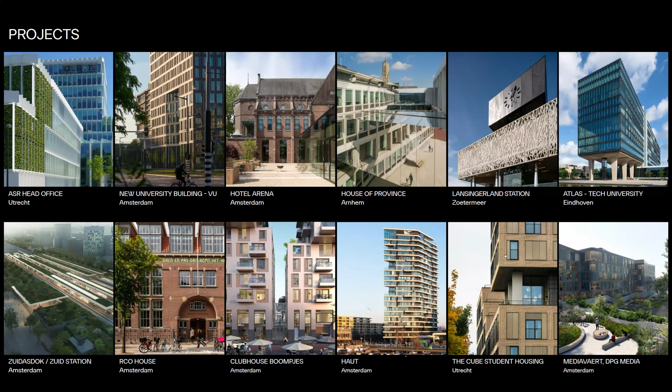Our office does many sorts of projects, mostly in the Netherlands. At the moment we do one project in Belgium, and we work on train stations and mobility. We work on refurbishing existing buildings often, and on sustainable new build projects, both residential and office, and various cultural projects. That diversity we really like, and it helps us transfer knowledge from one kind of project to another. It's an office of about 55 people in the Netherlands, so I'm here representing all of them.

In 2016, as was said, we started working on a timber tower. One interesting thing to realize when talking about sustainable buildings is that population growth worldwide is going to happen within cities, not so much on the outskirts, but really in dense inner cities. Traditionally these cities were always made, this is London where I studied, out of steel, concrete, and glass.

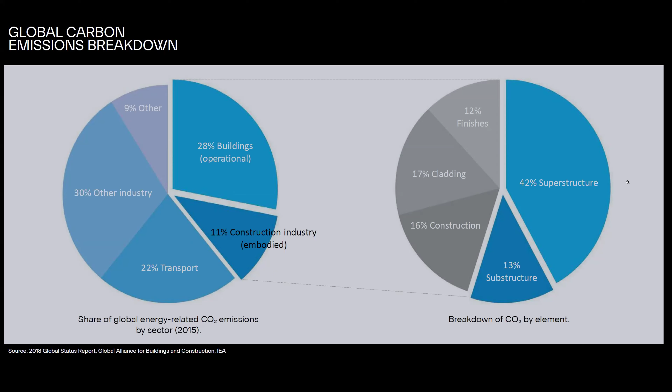When looking at the carbon emissions of the building industry, buildings are a large part of that construction industry. But within the construction industry, the superstructure of buildings takes up by far the largest part of the carbon footprint. So for us, it felt quite natural, when looking at sustainability, to look at that superstructure first. We started looking at timber buildings at a time when that was not often done yet, specifically not in the Netherlands, but actually even worldwide there were only a few large, tall buildings made with timber.

But timber has a number of great advantages. The timber stores carbon while it's growing, and the carbon remains stored in the timber as long as it's not burned, rotting, or taken out. It's a circular material, it's flexible, it's beautiful, we think. It's comfortable, it's lightweight. It allows for faster construction, and it allows for customization because it's not coming out of a mold, but can be computer aided, sawn or shaped. That way you can really make each component of a building to a custom size or custom form.

That storage of timber is important in the whole story. So before you actually construct a building, the timber stores the carbon. A building then, of course, by using energy and all sorts of things, starts to emit carbon again. But because you start from a kind of negative impact, that is always helpful in the long run across the whole lifespan of a building. It was nice also because timber is really circular in its production.

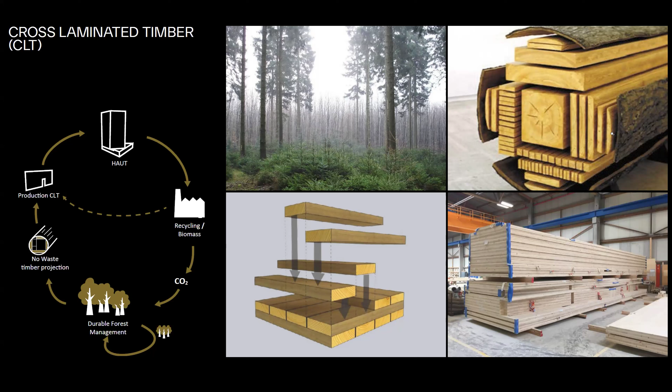We also like that the mass timber we were going to use for HAUT isn't the hard inner core of trees that's used for CLT or mass timber, but actually the outer parts, whereas the inner parts are used for furniture. It's actually the leftover area of the tree trunk that's used for this mass timber. When we started in 2016, we went to see a factory straight away, and you see how lightweight the pulleys are to lift up an entire wall panel.

That really shows that building in timber can be done with lighter equipment and with less energy production or energy consumption, and therefore a smaller footprint on site as well.

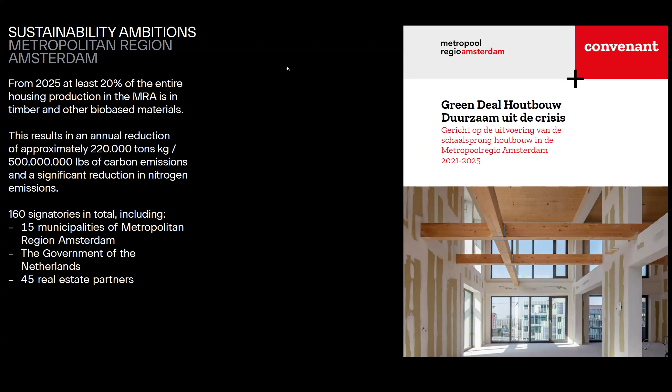Since we've started in the Netherlands, I thought I'd give you a quick insight into what's happening in timber building within the Netherlands. The main cities in the metropolitan region have committed to a Green Deal of timber building, saying at least 20% of housing production should be in timber. This includes governments, local governments, construction companies, developers, and architects, all committed to attempting to get at least 20% of the entire housing production in timber.

We haven't been able to calculate yet whether that's going to happen this year.

One of the interesting things about the Netherlands is that we have a code structure that is performance-based. So in the Netherlands, it's relatively easy, compared to for instance Germany or North America, to use our building codes to innovate, because we can engineer to structural standards. It's not given that we can only build, for instance, 6 stories in timber. We can build as much as we can, as long as we prove with calculations, conforming to certain norms, that the buildings will stay up and are fireproof.

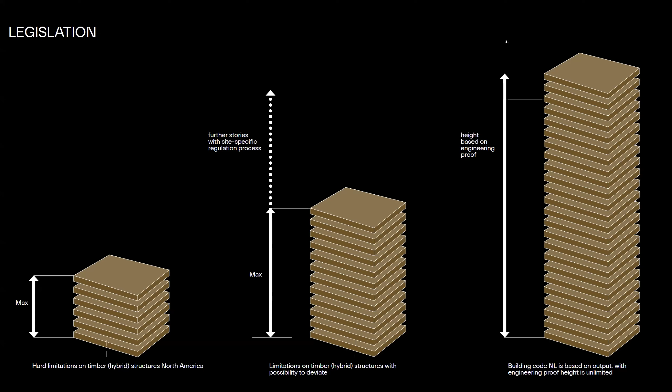What we also notice is that there are quite a few timber networks in the Netherlands, various networks of companies and people who work together to really share knowledge, to innovate, and to push timber building forward.

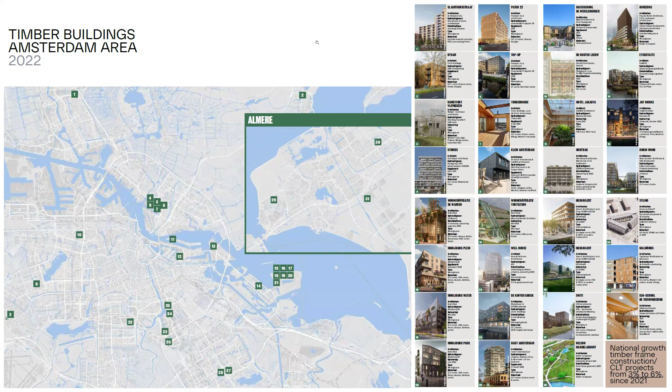This is Amsterdam, the city I'm calling in from, and this is a map from 2022 of timber projects that were on the drawing board, on site, or built. This shows that it's not quite a main revolution yet, but it's really taking a leap.

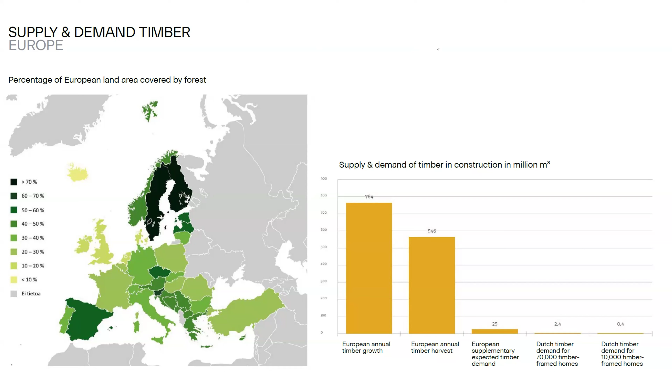Evgeny will talk about this much more, but there's still a lot of timber supply within Europe and outside it. The calculations at the moment show there's an excess of production forest, so we can still continue to build a lot in timber.

All that helps to move the construction industry from mainly focusing on concrete and steel towards one that is also using timber.

What I really like as an architect is that you put these little saplings in the ground, forests grow, and if you harvest those sustainably and carefully, you can regrow saplings. It's that fully circular material.

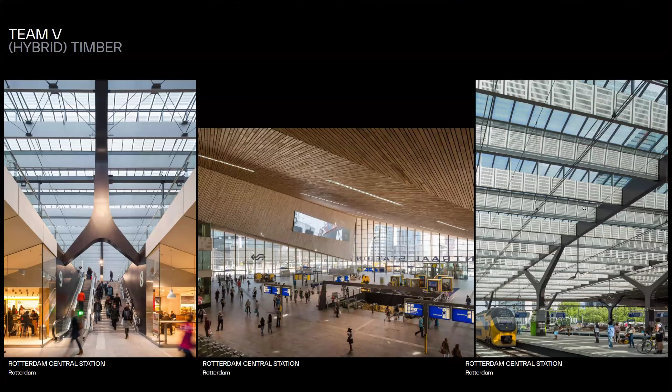As an office, for the first time, we worked with large-scale laminated timber construction, timber beams in this case, on the Rotterdam Central train station, also using a lot of timber cladding. At the moment we have delivered various projects, and I'm going to be talking about those today briefly.

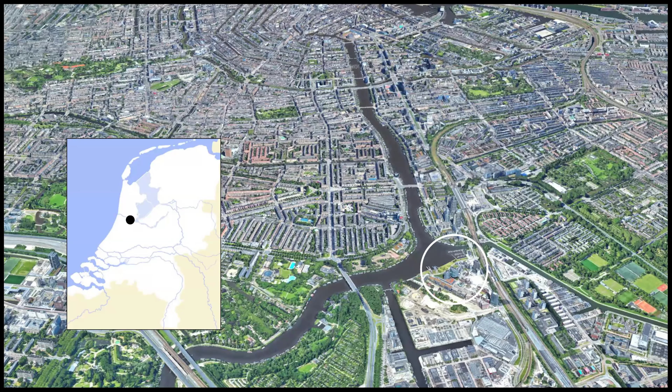HAUT, the first tall timber tower in the Netherlands, is located just outside the center of Amsterdam on the river Amstel. It started at a time when there were only 5 other large-scale timber buildings worldwide. We did a render in a tendering process, in a competition process, and in the end it turned out like this - realized in 2021.

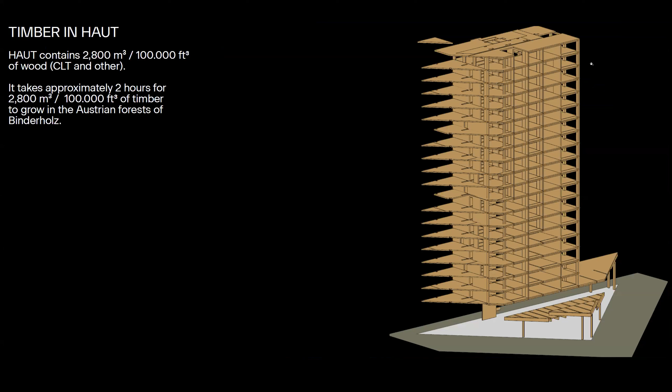HAUT contains 2,800 cubic meters of wood, which takes about 2 hours to grow in the production forests of Austria.

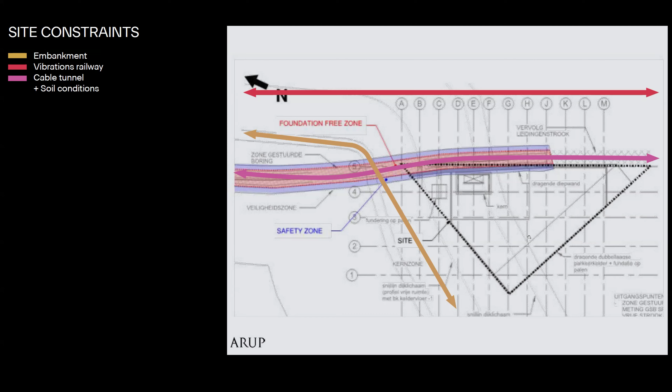It's alongside a train track, a road, and an underground dam for the water, so it's tricky ground conditions that meant our building was really challenging to get stably founded in the ground. Still, we really worked towards a hybrid construction.

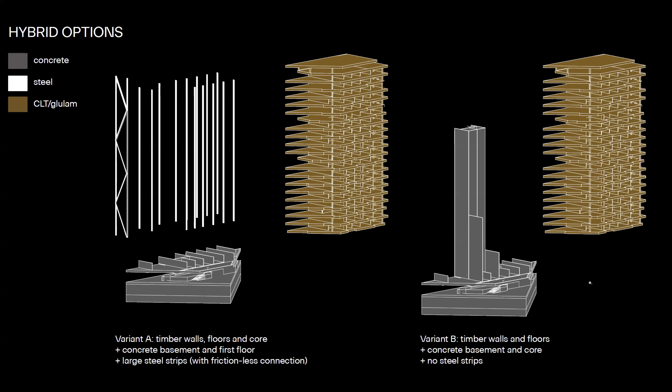It's actually a hybrid building with steel, concrete, and a lot of timber. We compared 2 ways of building: one with a main timber structure using steel strips to create integral stability through shear walls, and the other using a concrete core with 2 fins of walls and everything else surrounding it in mostly timber with a bit of steel. In the end, the version on the right was faster to build, technically less challenging, but most of all had a smaller carbon footprint. So this hybrid option with concrete and timber was what we went for.

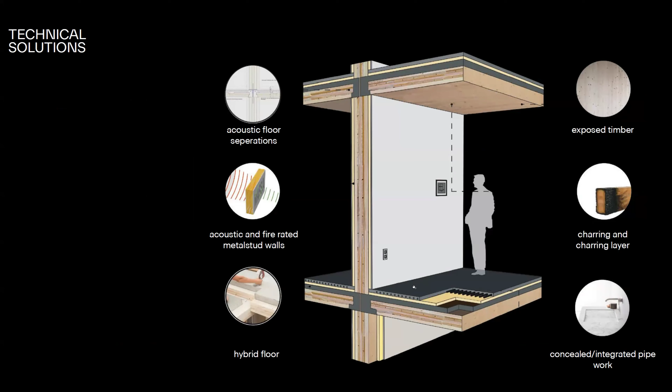These integral floor elements were made in the factory, and the concrete and the timber are joined together with a kind of Japanese joint and various kinds of screws that were put in to create a structurally integral element that also helps for vibrations and noise.

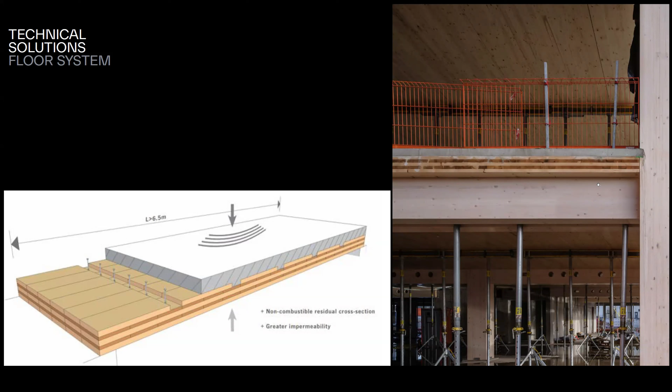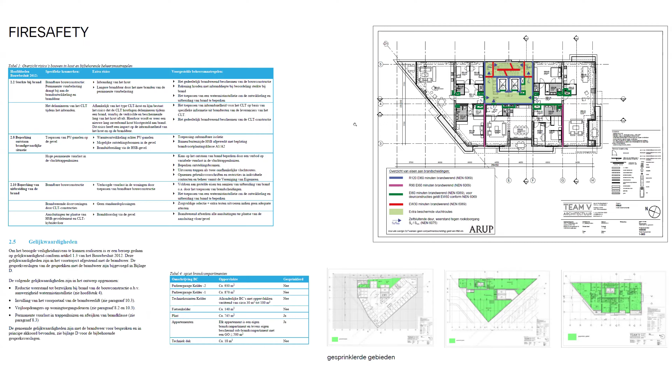We worked with Arup also on fire safety, and the building has compartmentalization, of course. The concrete core helps for that. In general, the building structure has a constructive fire rating of 90 minutes, and the sprinkler installation helps to get it to 120 minutes, which we need for a 70-meter tall tower.

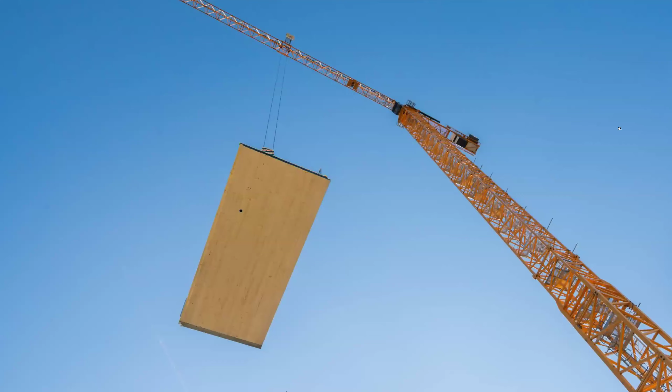So here you see the concrete core going up, and around it the timber elements of the floors and walls that are lifted up by the crane, then installed in place, first the walls with a kind of steel fins to then connect the floor plates to, and here you see it on site.

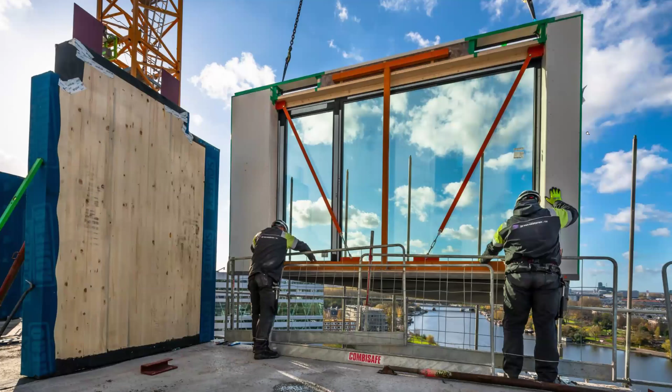With the various openings that we made for the apartment layouts, within 6 working days one whole floor was installed, both structurally and with a prefab facade that already had the window frames and the glass in it. So the facade was really important to get it fast onto the structure to make sure it was watertight.

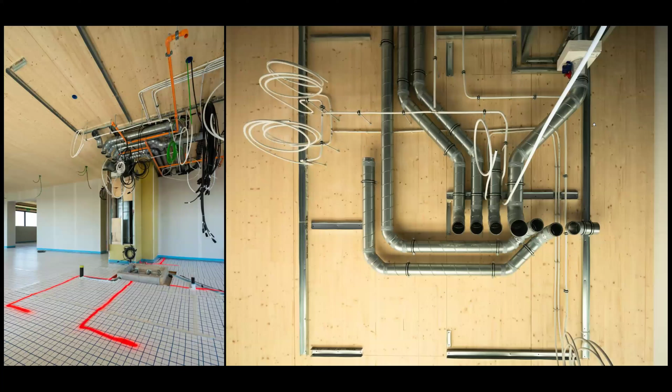The building is nearly all what we call an open building. So all the MEP, which in the Netherlands is generally cast into the concrete and therefore not easy to change, is here open and mounted on the timber so that MEP can be changed over time. The only thing that is not like that is the underfloor heating and cooling.

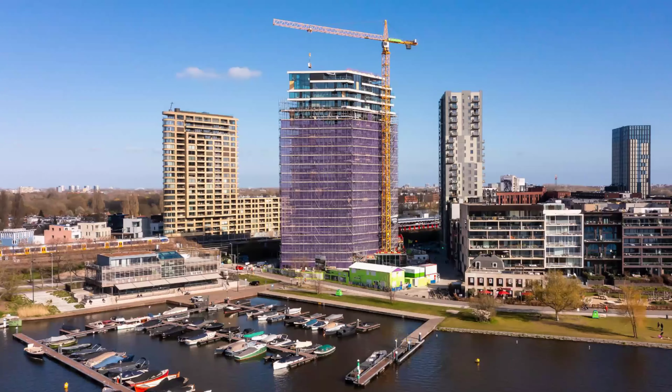And here you see the scaffolding going back down on the facade.

This is a high-end apartment tower. It was one of the last apartment towers that were for the free market only. So all the apartments have been for sale, and have been sold in the meantime.

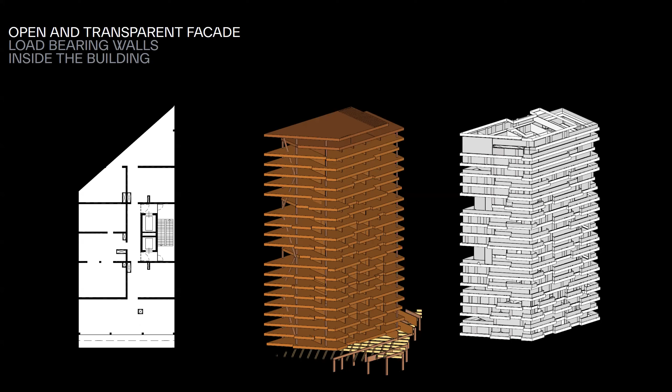We wanted to maximize the views of this beautiful location, so we made a kind of comb structure out of timber and concrete. That is the main structure of the building, so that we could keep the facade all transparent. Here you see that also in the plans. It also allowed for very large balconies and openings, and here you see that in the facade.

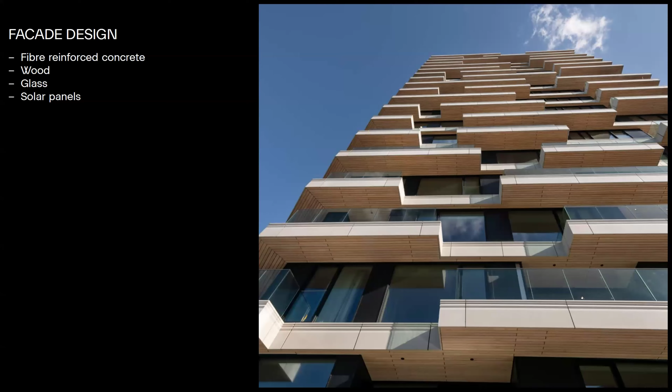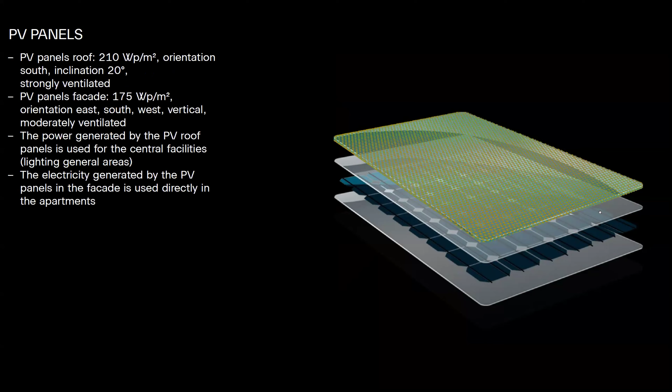We put lots of PV panels in the facade, in total about 850 square meters, to provide energy use for the apartments. So the energy is actually used for the apartments themselves. We integrated that into the facade in a way that we maximized with a computer model all the revenue we could get out, even though there are balconies and overhangs, but also so that you didn't see them so much. In the end, the facade does look really great.

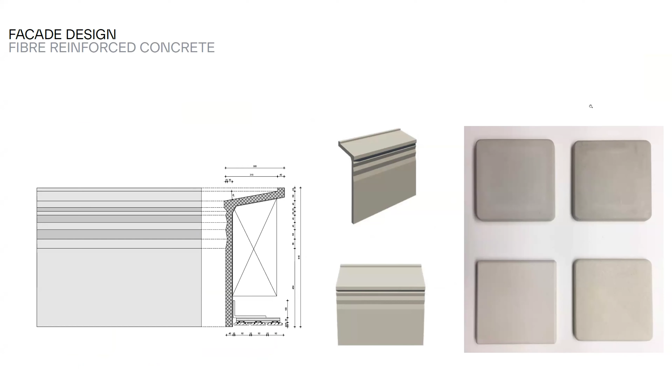We used a super thin concrete for the roof, for the floor edges. And of course, the detailing of these timber buildings for the first time was really quite tricky to do well and to make sure that it all complied. Here you see again the hybrid floors.

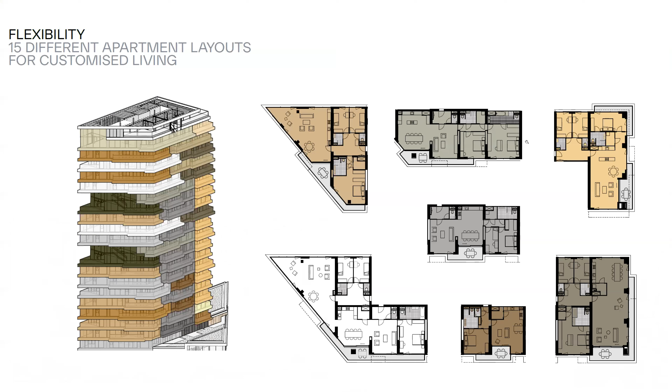We worked with some of the residents to provide layouts for each type of apartment. There's a whole variety in this building, from very small to very large. One of the things we managed to do, also due to the sprinkler installation, was to make sure that the ceilings could be exposed, which saved the cost of cladding, but also made sure that you can actually see some of that timber.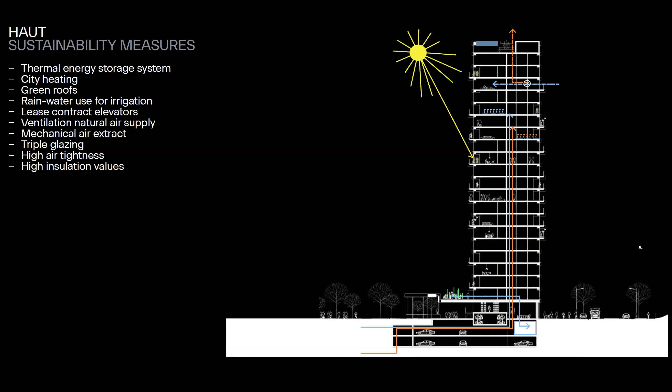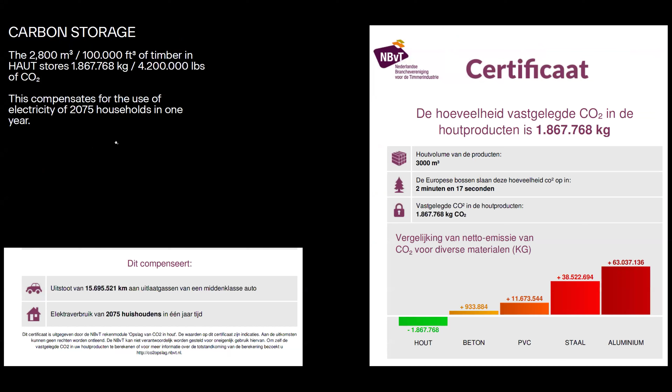It was a building for us that really took a flight. It was published internationally at the time. And we're really happy that we managed to realize it, because during construction, or just before construction, that was really quite tight.

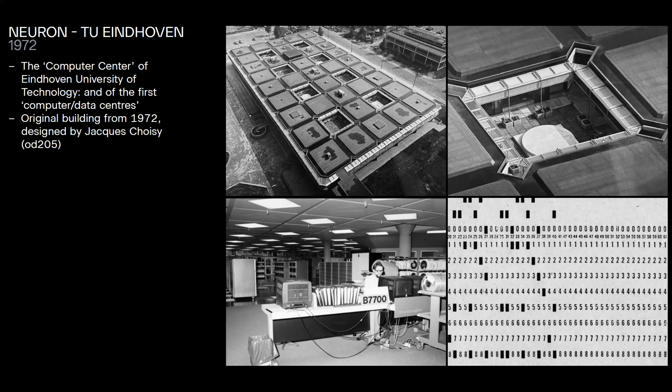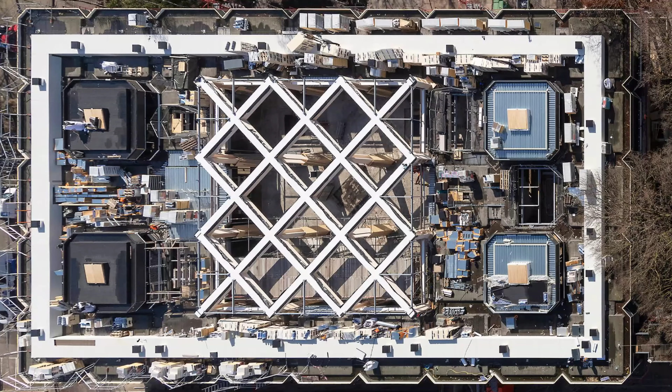I'll flick through a few other projects very quickly. This is a project where we topped up in timber on an existing university building, making a hole in the middle and putting a lightweight timber structure on top. That helped because the main structure of the existing building could then hold its extra weight, and it gave us a kind of atrium space on an existing building. We find that topping up in timber and adding to existing buildings in timber is also really worthwhile thinking about.

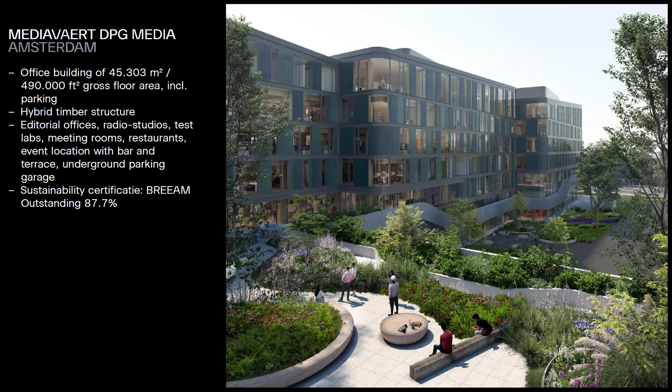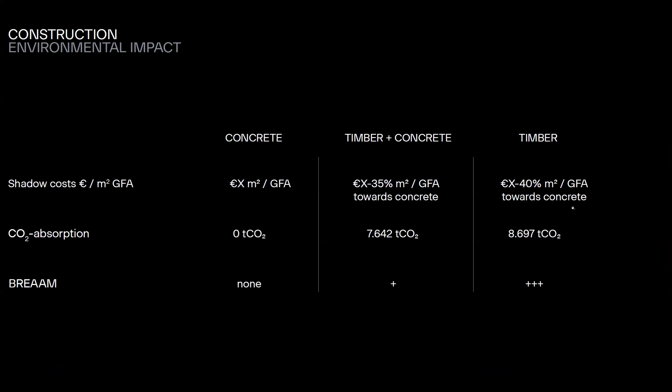Our second to last project is an office building where we did a comparison between concrete, hybrid, and timber, in terms of the amount of carbon stored, and also in terms of cost. So the main cost, the traditional cost, the extra cost for hybrid, and the cost for full timber.

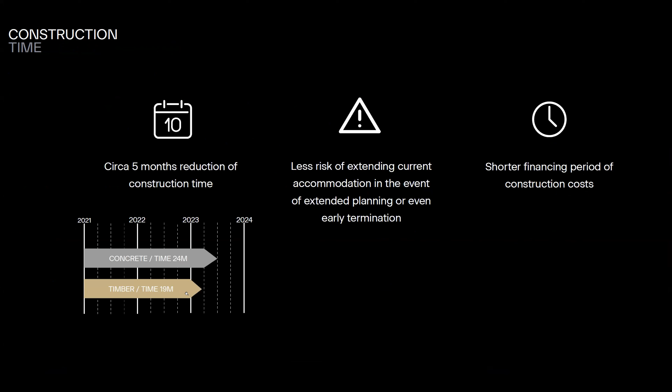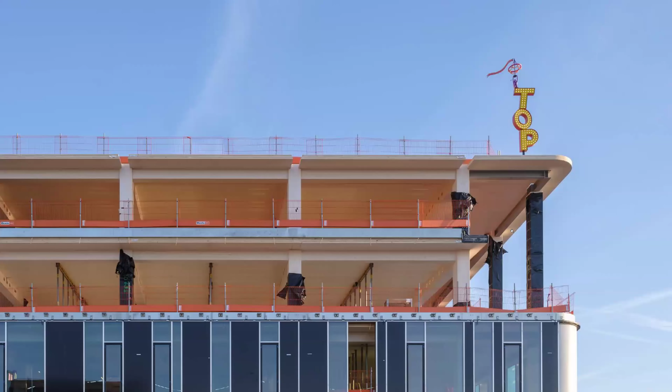That's one of the issues we still find in the Netherlands: it's still difficult for large-scale buildings to get timber to earn itself back. But here, the construction time in timber was reduced by 5 or 6 months, and that really made a difference. I think that's also one of the big arguments to build in timber - you really can build fast.

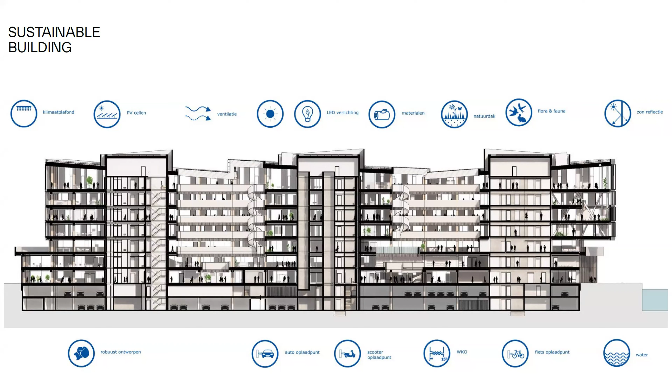Again, it's a hybrid, so we use some steel, much concrete, and a lot of mass timber. In offices, we find that meeting the regulations for fire and acoustics is a bit easier. Again, we added a lot of sustainability measures. Here you see a section with the comfort measures. This is the building - it's 45,000 square meters in a hybrid structure.

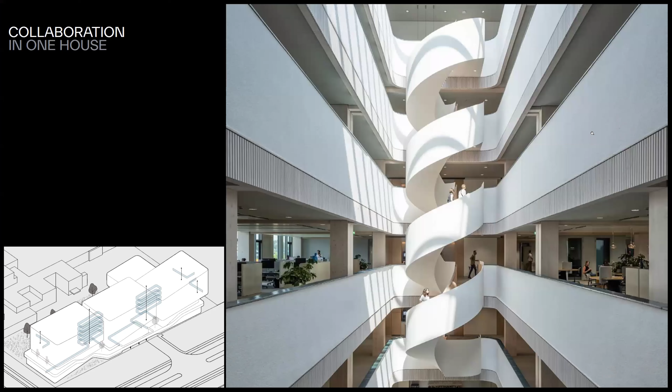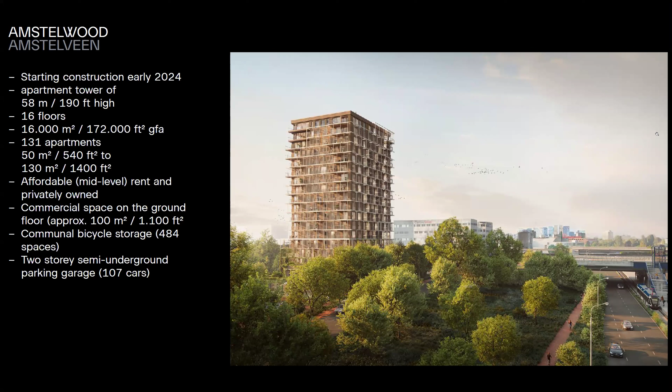For an office building. And then one last one is one that we currently have on the drawing board, which is about to start construction later this year. It's affordable housing in timber. Again, in a hybrid form, it's about 58 meters high, so it's less tall than the HAUT building. But what we like about this is that we really worked toward a much more affordable structure in timber.

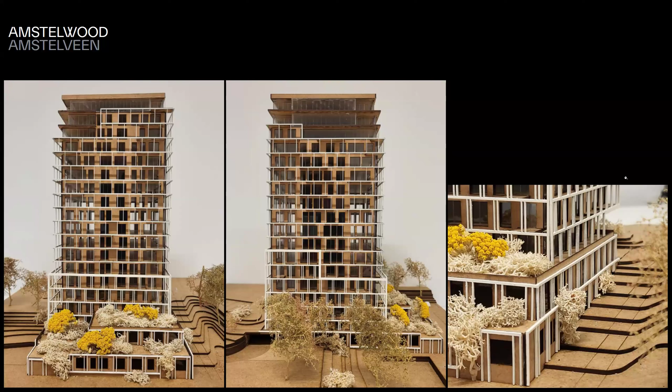So we made a square and simple building. We put a kind of lightweight frame around it to hold up balconies and loggias that we needed for sound reduction. Again, we searched for a hybrid structure with concrete in the middle, steel on the outside, and in this case, timber box elements for the flooring. A super efficient layout, and again the same fire rating - 90 minutes on the timber structure, but with a sprinkler installation to get it to 120 - and timber cladding on the outside. So we also use a bio-based material for the cladding of the building.

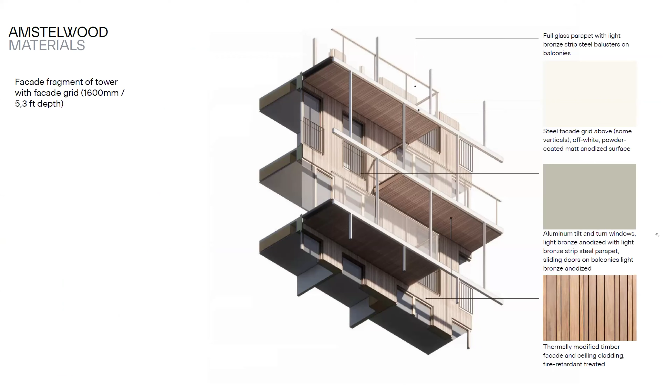And that's it for me. I'll stop sharing.

When we talk about Ukraine in terms of timber construction, the question is, how can we build of timber? Do we have any good practices? Do we have any objective advantages timber has over other materials on the Ukrainian market? Or, because you need to discuss it with the client, and you start talking about its ecology, about its low carbon footprint, the client would say, okay, let's really talk about real advantages, you know.

When we discuss the Ukrainian projects which are now under construction or under design, we cannot, like our Dutch colleagues, show any high-rise timber constructions - but we are going to do it in the future, we hope. We have some objects, including the Lviv workshop, a prosthetics workshop, and I would like to analyze what we have in my presentation using this building as an example.

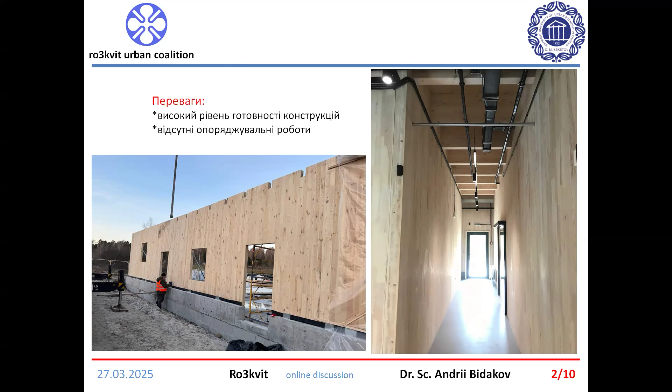Timber is maybe not the cheapest material in the Ukrainian market, but the comparison allows us to say that because we do not need to finish it with anything else, this high price will be compensated in comparison with metal structures and concrete. On this slide you can see the combination of glulam panels, CLT panels, and glulam beams. Today we have CLT panels in more demand because the global trend is to build with large spanning length modules.

CLT panels are used as flooring, for instance, if the designer decides to. But the building in Lviv has spans of 8 meters, and we decided to combine glulam and CLT panels, which allowed us to reduce the overall cost of the construction works.

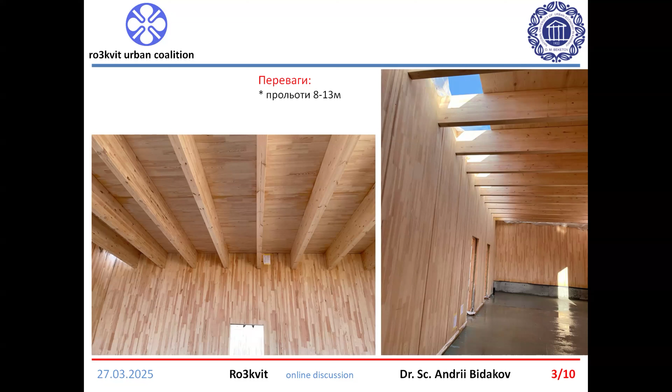We have clients who are our fans, supporters, and they understand the advantages of timber construction very well. Our supporters include quite a range of architectural offices. Their heads are convinced that we must integrate timber constructions in contemporary Ukrainian architecture, but they also ask us about disadvantages and hindrances.

When we are talking about fire safety for people, we must be honest. For us, human life is the top value, so we must provide for as much time as we can for people to evacuate from the building. When we talk about steel, the problem is heating: 600, 700 degrees above zero, and the structure collapses. We must evacuate people before this temperature is reached.

Timber is a natural material. It is charred, and the charring intensity can be calculated over time. So it will take a couple of hours, several hours, for the timber structure to collapse due to fire. As I said, we do not need any plastering.

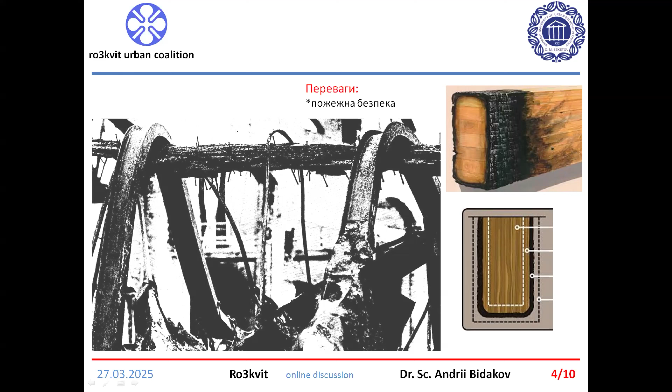In timber construction, the fire safety is provided for by the width of the cross section in beams. Sometimes we can cover it with plasterboard panels if this is the task. I would like to reiterate, timber is absolutely fire safe, and we need to...

We need to amend the existing documents, existing regulations in construction, so that, like our European colleagues, we could increase the number of architectural objects made of timber.

Here I would like to use some examples from my architectural bureau. We are designing timber constructions. Presently, we have designed a range of buildings which are going to be implemented, constructed this year and next year, hopefully. And presently we see that this year we have more than 1,000 cubic meters designed, and they are going to be built.

So there is demand for timber construction, and we are also starting to get some requests from the ministries, really, and state structures.

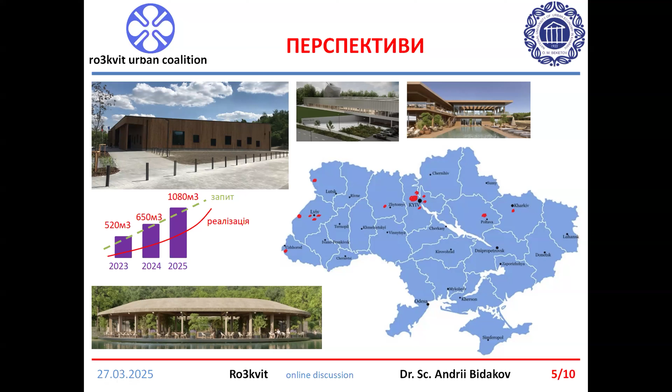In the western part of Ukraine, construction activity is very high, and in Kiev too. Very often we get requests for timber structures, timber buildings, and sometimes we're not even asked how it is going to be done — high-rise construction made of timber.

This is possible today, and our design bureau is ready to design them. We have a manufacturer able to provide sufficient quality, and the only real hindrance is the current regulations for fire safety. I illustrated this as a fire-breathing dragon — we need to resolve this issue and raise awareness that timber structures are, once again, fire safe.

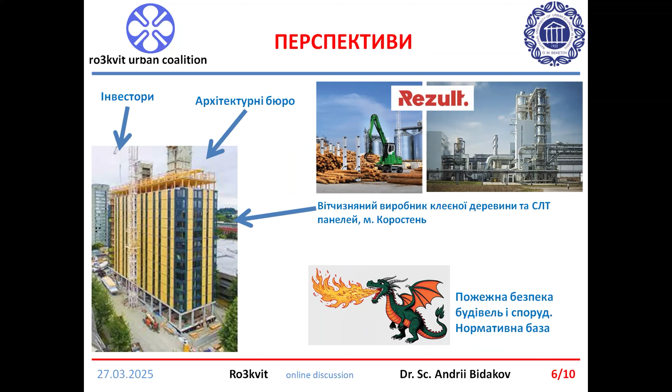Presently, the projects which are going to be implemented already have specific trajectories. The first trajectory clearly is the design phase, then expertise, then designing specific documents which substantiate the suggested solutions, because they contradict today's normatives, and we are experimenting here.

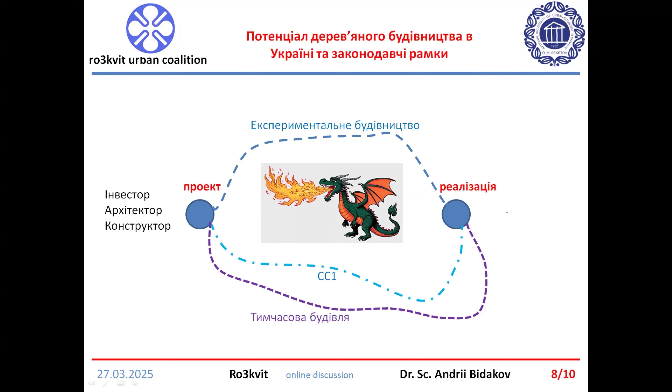The third way, bridging the gap, is to list the building as a temporary one. If the building is temporary, the regulations are not as rigid in terms of fire safety, etc. I don't know what happens after the expiry of the temporary status of the building, but the first steps we take following this third route show that there is a problem — but at the same time there is a wish expressed by developers to build of timber, to use timber for structural elements.

Another object, which is my pride and joy, is a gas station on the Zhytomyr highway. You understand the fire safety issue is illustrated like that. They built this gas station out of timber, and it's an implemented project. I don't know exactly which of the three routes was followed to build it.

It's a kind of expo hall that has a lot of traffic and promotes timber construction. Every time I get the question, were you the designers? I say no, but I love the project. Then I'm asked, isn't this a structure that can be affected by fire? This is a gas station.

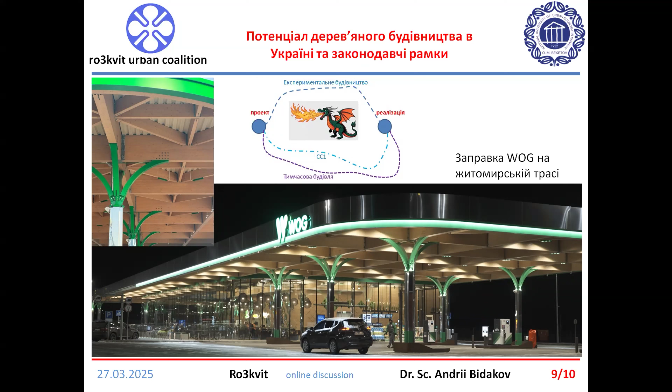Then I start getting questions — why aren't we using timber for other projects? Because there are so many good practices on the internet. So our clients are starting to find ways to build kindergartens and schools out of timber. The very existence of this timber-made gas station is very important, and it shows that where there's a will, there's a way. All we have to do is tweak our legislature to make the ways to build of timber legal, so architectural teams will be able to practice timber construction.

This is my last slide, and I chose it as the last one because timber is actually very long-lasting. Timber lasts 150, 200 years, and this slide shows a five-story parking structure made of timber. All the constructive issues can be resolved through selecting the specific necessary cross-sections and dimensions of the wooden elements.

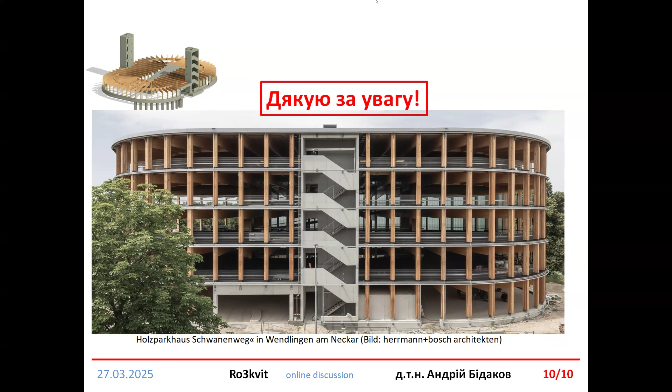This project shows how durable, resilient, and long-lasting timber can be. We must prove it, we must illustrate it, and I think this parking project answers quite a lot of questions — it illustrates that not only some public buildings can be built of timber, but we can use timber to build very functional buildings like this one. Thank you very much for your attention.

Thank you. I promised the audience ambassadors for wood, and well, we have them, you are the second one. Really, really great stories, and yeah, I would say proof of how fantastic this material is. The gas station is amazing, it also looks great.

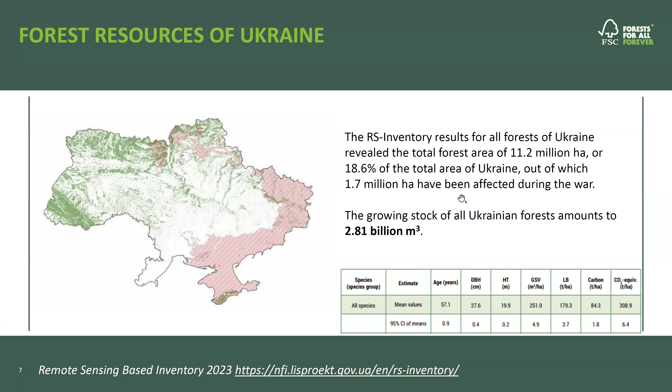Next step, logically, is to consider how much timber is harvested, and can we do it? Are there any risks? What are the constraints? Here I need to start with the fact that yes, there must be constraints, limits imposed upon both harvesting and growing timber. When we are talking about the approach which includes both ecological and economic factors, we must understand that not all ecosystems can be used for forestry. Steppe cannot, for instance. When we are talking about degraded agricultural lands, we must be very cautious, but depending upon the context, we can use such degraded lands both for forest growing and for recreating the initial ecological systems.

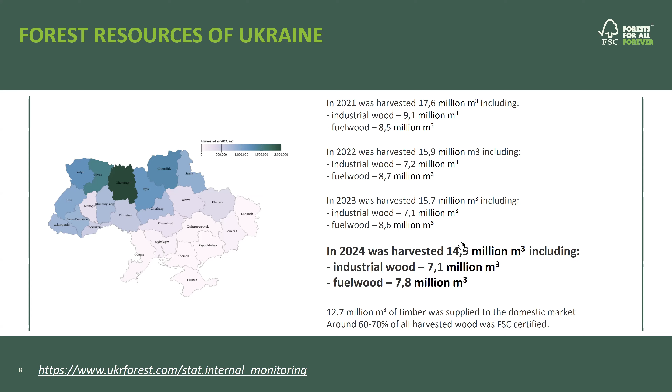And we have standards which show that we can be even more cautious in terms of using ecosystems and maintaining them. And one of the ways is FSC certification. Ukraine today has around 44% of certified forests, FSC certified forests, in the most forested regions, as you see on slide.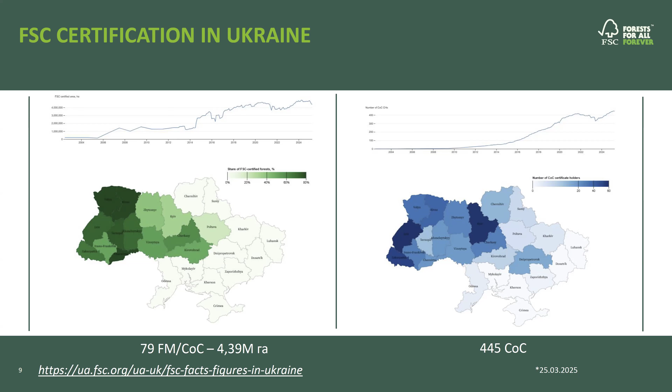And also FSC is the road towards long-term changes. We have, of course, specific approaches which are not understood in European countries, but FSC tries to exert positive influence and to foster the transition, to promote the transition from the traditional classical approaches towards aligning our approaches with the approaches which are European and which are aligned with European strategies in forestry.

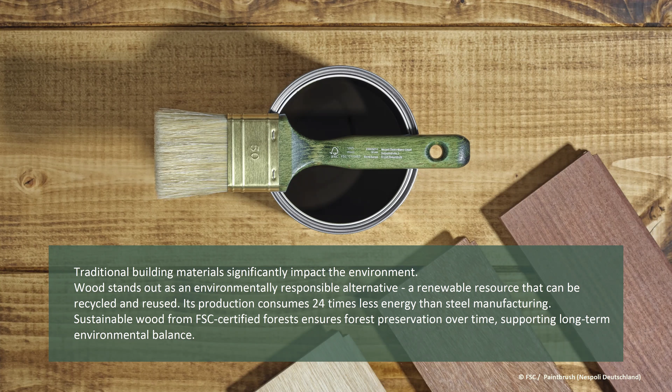So let us now talk about timber construction. To add to the things my colleagues have already said, I would like to say that carbon can be operational or bound. Operational carbon is released when we are heating the premises, when we are building, while the embodied carbon is contained inside timber, bound inside timber, or which is absorbed as a result of manufacturing.

If we compare the carbon footprint in the context of energy production, we understand that when we build of wood, we reduce our energy costs and we leave a smaller carbon footprint. FSC for a long time has been promoting the circular economy principle and also the cascade principle.

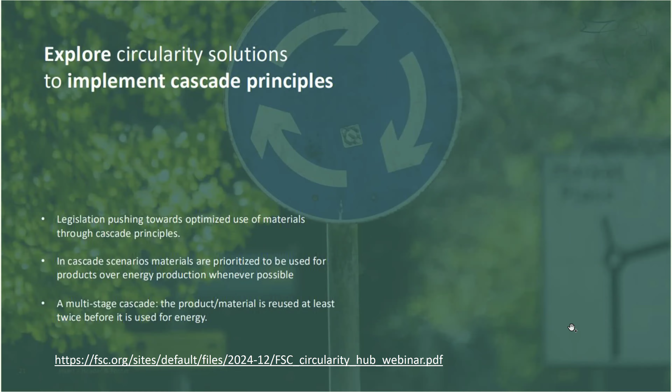Last year, we were also conducting a webinar on timber construction. One of the issues we explored was setting priorities in terms of timber construction. When we are talking about cascade principle, it means how much time we can contain this carbon, and construction, furniture manufacturing have a range of advantages in comparison with energy production. This presentation has links which can be used by those who would like to explore this issue in more detail.

So also FSC certification includes a specific branch of certifying projects when architects, developers undertake additional requirements to use a rating system for labeling their products which they use in construction, and FSC is one of the options. When we are talking about certification of the projects, this is an approach which means that when we use timber in construction, we pay attention to where and how the timber was harvested.

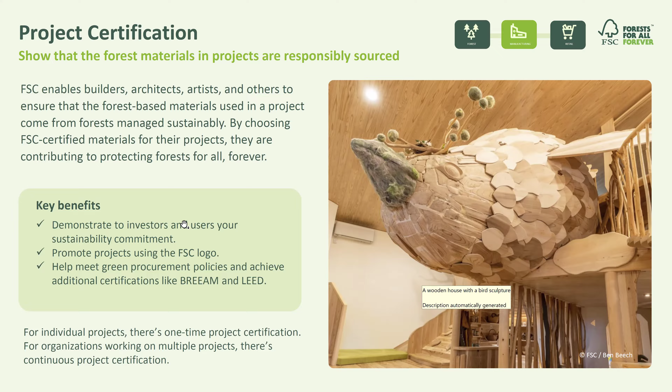And so the whole chain of custody participant adheres to the undertaking requirements to use the ecologically safe timber. There are many good practices in the world of the application of FSC principles. Here you see Formula 1 Grand Prix paddocks in Canada.

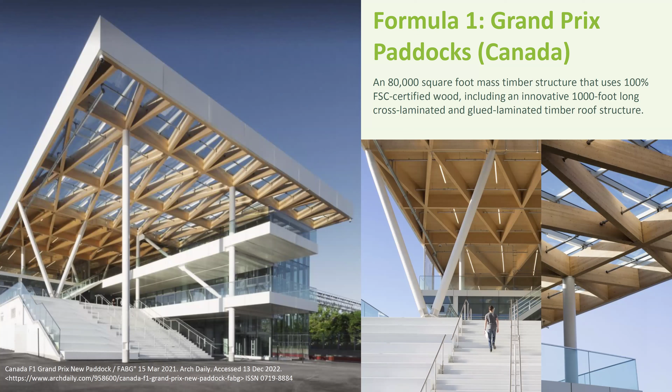This is an example of a construction which is built of 100% FSC certified timber.

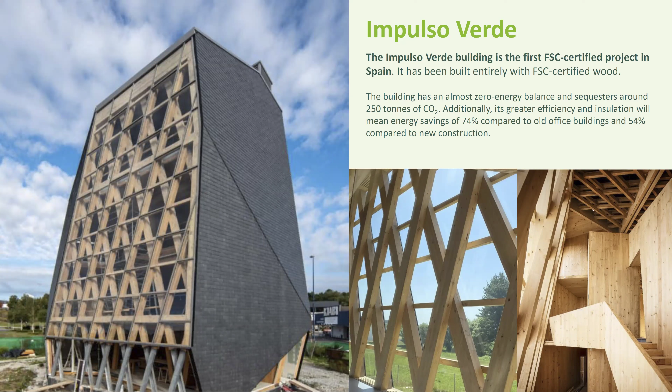Another interesting case is the Impulso Verde building, which was built with FSC certified products in Spain. And here the focus was on counteracting climate change by reducing the carbon footprint.

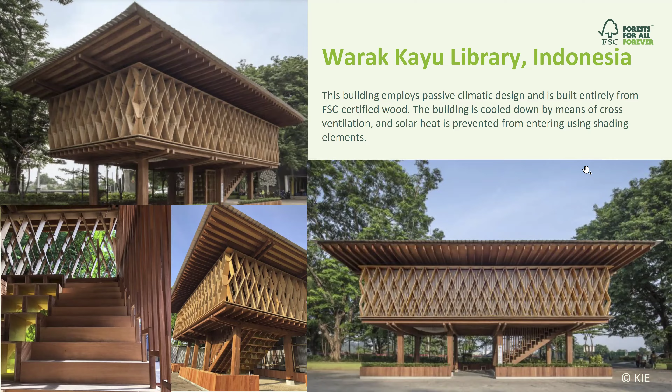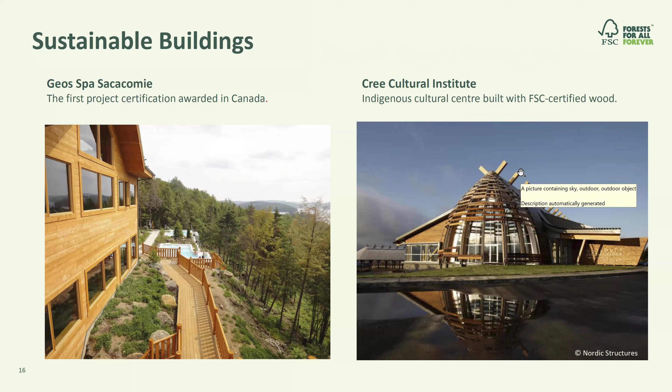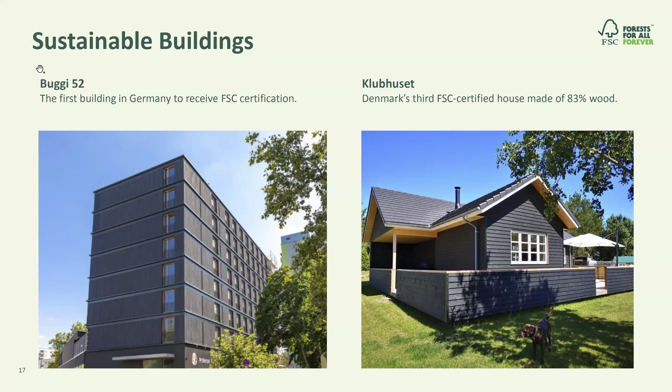Another interesting example is the first FSC certified project in Germany, Buggi 52. As far as I know, the implementation process spanned over several years because the problem was the supply of the materials and their FSC certification, actually. Next slide.

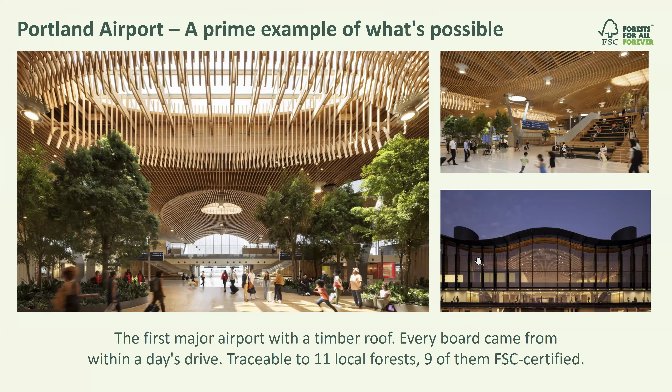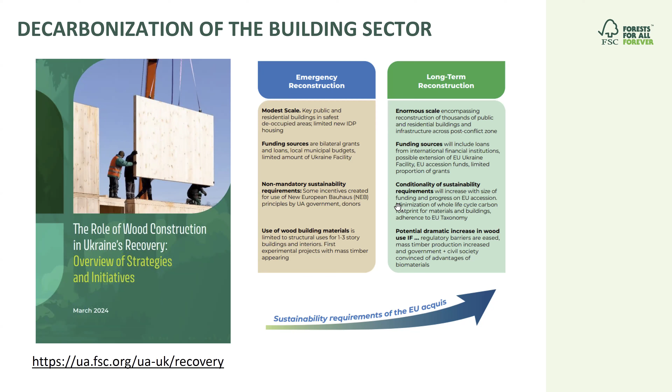Right, so last year together with our guest expert Brian Milakovsky, we prepared a report on the role of wood construction in Ukraine's recovery. You can download it on our website, and we posit that when we are talking about sustainability, well, we are now at the emergency reconstruction stage, but as soon as our reconstruction is sustainable, the donors and investors both are going to pay attention to the origin of our materials, to their certification, and they will be very eco-minded in such projects.